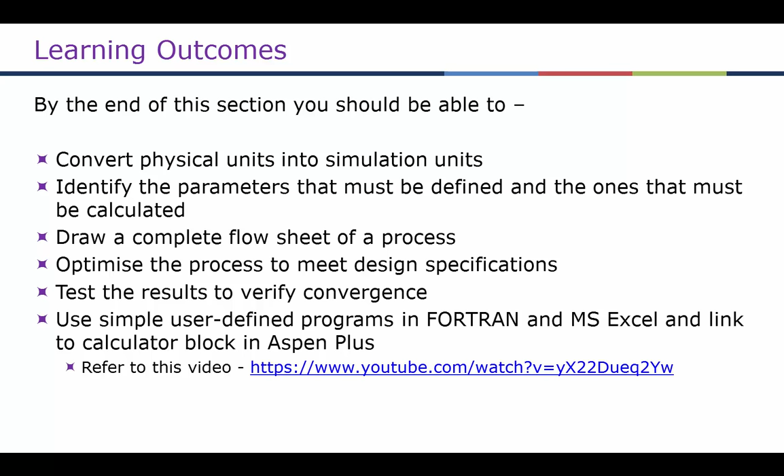Test the convergence and verify it, and use simple user-defined models like Excel and Fortran and link it to the calculator block in Aspen Plus. For the last part, for the calculator block, you can refer to the video link given here, and it's also in your lecture notes.

So the equation-oriented modeling is an alternative strategy for solving the flow sheet in Aspen Plus. We have briefly talked about equation-oriented modeling when I was introducing the process simulation in Aspen earlier.

The effectiveness of equation-oriented modeling is best when we are trying to optimize a process or solve a process which has been highly heat integrated or has many recycle loops or nested recycle loops, like the example given here, where the mixer 1 has got a flow going into flash, which then goes back into flash, second flash, and then recycle. And then you can see the recycle loops are kind of crossing over.

So this will have multiple tear streams when solving the sequential modular approach and can give some convergence problems, whereas equation-oriented modeling solves it in simultaneous equations and therefore gives you a better chance of converging this.

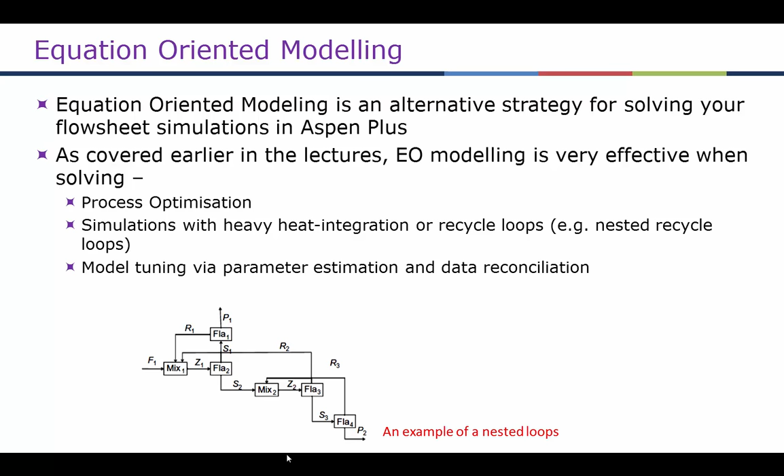We can also use this for model tuning or parameter estimation or data reconciliation. So model tuning is when you have an existing model or existing plant where you need to do some tuning. Parameter estimation is also for model tuning but gives you some extra degrees of freedom. And data reconciliation is again trying to optimize existing plant operation to get more profits or something for the process.

So the way to model a process in Aspen Plus is very similar to the sequential modular approach. The initial steps are the same. The sequential modular approach and the equation-oriented modeling approach are the strategies for solving the simulation once we have set up the flow sheet. The input required for both approaches is kind of similar, except the equation-oriented modeling approach requires a few more inputs.

We need to learn about the attributes of variables, and therefore we'll need to in the future learn how to change those attributes of variables, including their specifications. So I'll talk about what the attributes of variables are and what the specifications of the variables are in a few slides time. We'll need to then connect those variables and define our new equations which the equation-oriented modeling will solve. We may have to define an objective function for optimization problems.

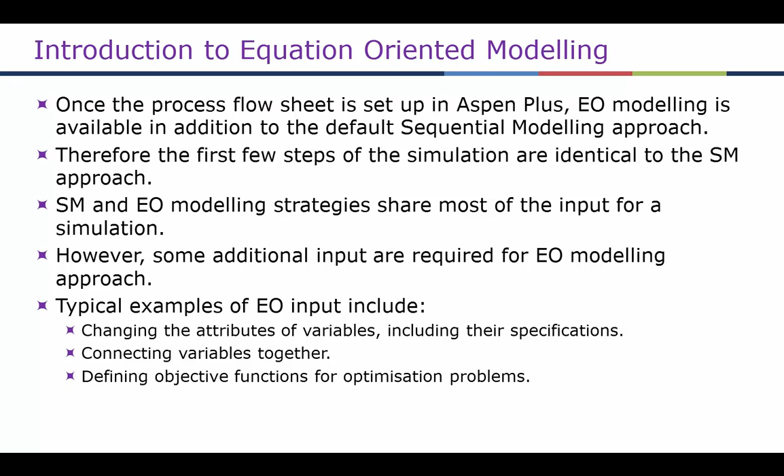Equation-oriented modeling approach works well when there is an existing solution which is close to the desired solution. In other words, it means that we need a good estimation. So it's always good to solve a flow sheet using sequential modular approach first, which is called initialization. And then when we switch to the EO mode, the EO mode synchronizes the solution with the SM mode and gets the first guess, and then uses that initial estimation of the solution to then solve the problem the way you want it to.

The sequential modular approach works only in one mode of operation. It has simulation mode, which is the default mode which you have been using so far in Aspen Plus. The model inputs and parameters are fixed and has no degrees of freedom. The choice of the variables that are specified in the input form determines which variables are fixed. So, for example, if you enter the temperature and pressure of the stream, then those parameters are fixed because that's user input.

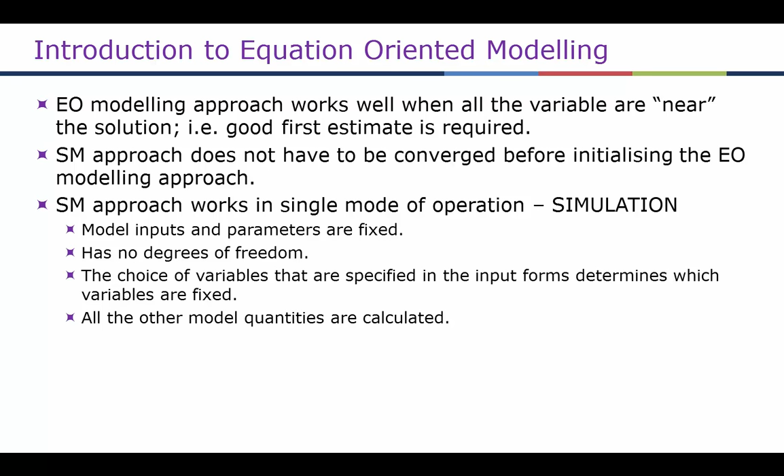The parameters that we do not specify are the ones the sequential modular approach will calculate. So those are called the calculated values, and the user input parameters are the fixed or the constant values.

The EO modeling approach, on the other hand, has got 4 different modes of operation. Most often you're going to use only the simulation approach again in Aspen Plus, and in this lecture I'm going to only cover the simulation approach. This mode is a prediction mode and has again no degrees of freedom, similar to the SM approach. For a given feed condition and operating parameters, it computes the solution for the products.

Whereas parameter estimation is a model tuning mode, has no degrees of freedom again, but inputs and certain outputs are fixed and the model parameters are computed. It requires one measured variable for each estimated parameter. So this is the attribute of a variable.

Reconciliation mode also is for model tuning. It typically minimizes the weighted least square objective function. So we need to define an objective function, and then the model reconciliation will minimize the weighted least square objective function deviation between the model predictions and some plant measurements. So you need to have data from an existing plant to minimize the solution again.

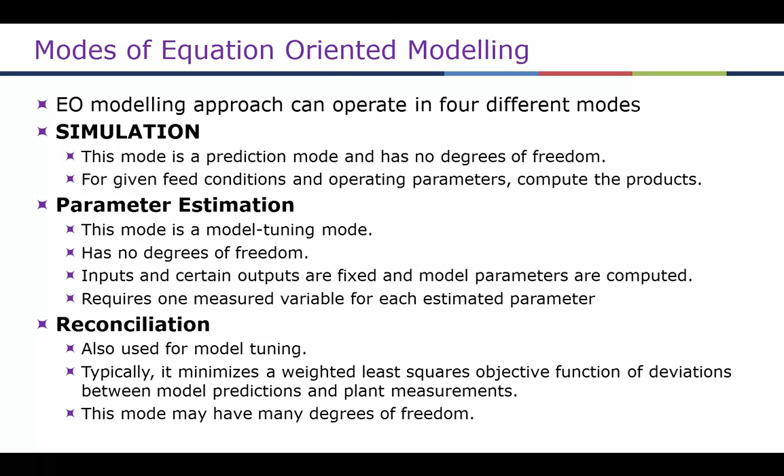So what I'm trying to say is you're going to model an existing plant and try and predict the behavior of an existing plant using the reconciliation method. So this mode can have many degrees of freedom. Optimization. In this mode, usually you have again some operating conditions from plant. Those are given as set points, and you want to then maximize or change those set points so that you can maximize the profit, and therefore again you have many degrees of freedom here.

The fundamental difference between all 4 modes of operation is the way the variables are treated. So now I'm going to define what those specifications of the variables are and what the attributes of the variables are. So the status of the variable can either be fixed, free, or have degrees of freedom. So these are the attributes of the variable. When the variable is fixed, the solver cannot change the variable value.

For example, for a feed stream, you might have given the temperature of the stream. Aspen cannot change that temperature until you do design specification or something like that, which we will cover in a few minutes. But in a normal solution, Aspen Plus cannot change the value which a user has input. For example, temperature, pressure, flow rates, and so on, for which we have given the value. So those values are fixed.

The free values are the ones which solver calculates. So for example, you may have a reactor, a Gibbs reactor, or RGibbs. You have a feed stream coming into the reactor, and the Gibbs reactor estimates what will be the product stream flow rate and the component flow rates. So those are all calculated values depending upon the Gibbs minimization of the problem, including all the reaction equations that the reactor is trying to model. So the solver determines the value of those variables from calculation.

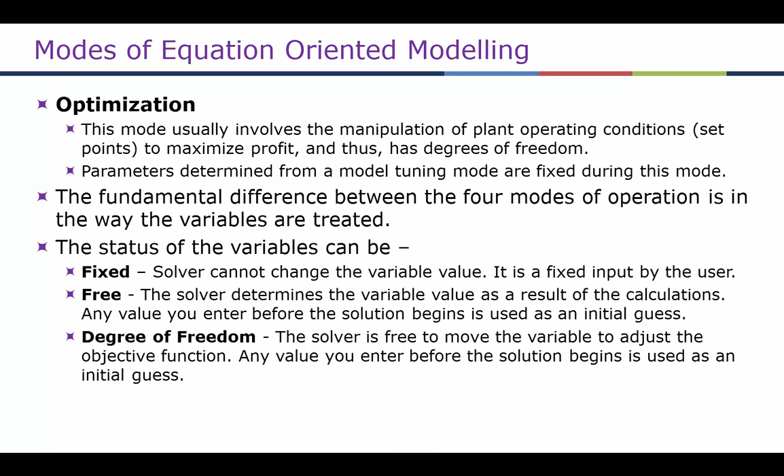Degree of freedom is an attribute of a variable when the solver is free to move the variable to adjust an objective function. So therefore, of course, there must be an objective function for which the variable is trying to have multiple values or have degree of freedom. So the Aspen Plus can move the value of that variable. So any value that we enter at the start of a simulation is treated as an initial guess, and then Aspen can then change those values depending upon how it wants to minimize the weighted square function of the objective function.

That's the same attribute for all other modes as well. So for parameter estimation, reconciliation, and optimization, again, calculated and constant value attributes are the same. So these are Aspen defaults. When we open the simulation in the sequential modular approach first and then switch to EO mode, we have only two attributes, either calculated or constant. If we want, we can change those attributes to measured, parameterized, optimized, reconciled, or independent, depending upon the type of the problem we want to solve.

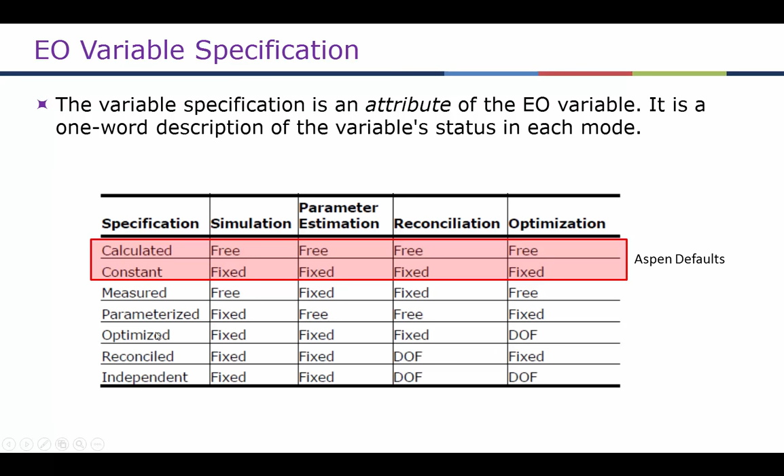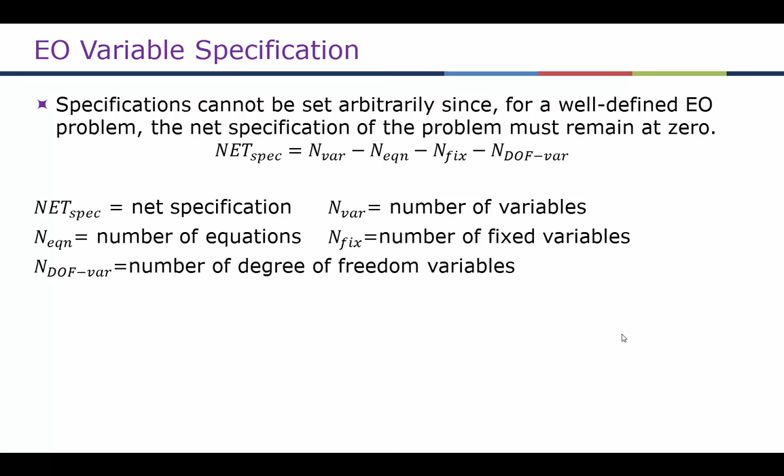However, we cannot just arbitrarily set any variable to fixed or measured or optimized and so on. These attributes have to be well defined so that the net specification of the problem remains 0. What that means is, if you use the equation net specification equal to number of variables minus number of equations minus number of fixed variables minus number of degree of freedom variables, the net should be equal to 0. If the net is 0 and there are no degree of freedom variables, then the problem is square, which means all variables are either constant or calculated. So that's the default system in both SM and EO simulation mode.

And the solution can be attempted using nonlinear equation solution, such as Newton method or Wegstein method and so on. However, if there are degree of freedom variables and still the net specification is 0, then the Aspen solver will try to minimize or maximize an objective function. So we define objective function right at the beginning in the first week of the lectures. If you are still not sure what an objective function is, you should go back and listen to the recording of that lecture.

If the net specification is more than 0, which means a positive value, then the problem is underdefined, which means you have more variables than the number of equations, and therefore it can have many solutions. If the net specification is less than 0, it means you have fewer variables and more equations, then there are no solutions. This problem is overspecified. So if net specification is more than 0 or less than 0, the problem is either underspecified or overspecified, and this will result in an error message in Aspen Plus, and it will not attempt to solve the problem. Right at the beginning, it will give you an error.

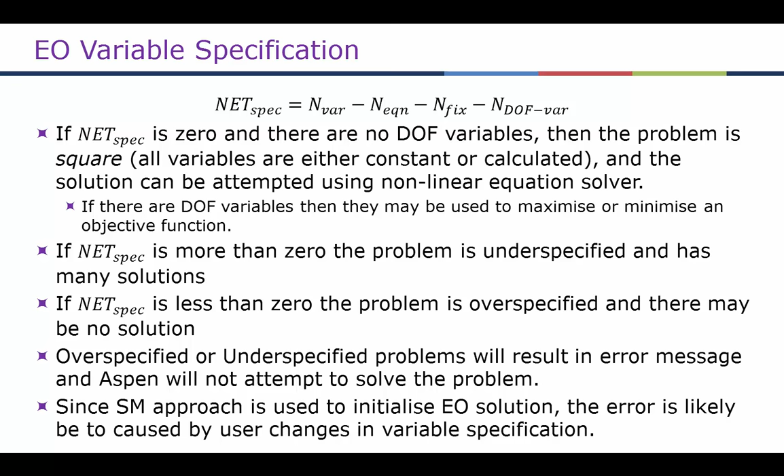Since the SM approach is used to initialize EO solution, you would have set up a flow sheet, you would have run it once in sequential modular approach and then switch to EO mode. The error can only happen if you change the attributes of the variables or the specification of the variables, right? So when you're changing the specification of the variable, we need to keep in mind that the net specification does not change from 0. If you have changed more variables than you should have, then the EO solver will give you an error message.

In both SM and EO solution, we have the desirable variables either constant or calculated. We can switch between the two in both SM and EO modes. So we can, for example, make a constant variable a calculated variable if we want. In SM mode, the way to do that is to create a design spec. So we will look at a problem very soon, but just to be clear, the way to change the attribute of a variable from constant to calculated or vice versa in SM mode is to use a design spec.

However, introducing a design spec often introduces an additional convergence loop. So you already had a convergence loop. Let's say there was a recycle, so it would have created a tear stream, and you had that for a recycle loop. But if you introduce a design spec, it introduces another convergence loop, which means another solver, which will try to do the recycle solver and the design spec solver together. So we are now introducing additional complexity in the solution. And when there are nested loops in the solution, SM approach might fail to converge to a solution. However, we can still switch to EO mode as long as we have initialized the problem. Whether or not the solution is fully solved, we can switch to EO mode.

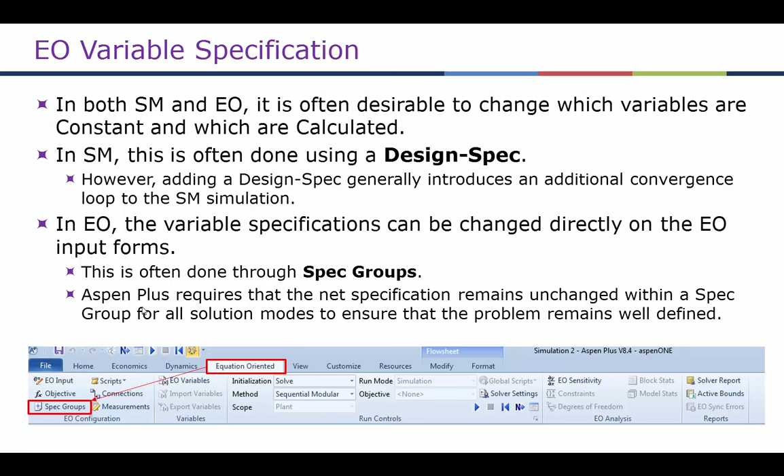So here's an example. In this example, we are going to recover acetone from a mixture of water and acetone using MIBK as a solvent. So this is a liquid-liquid extraction problem. In reality, you could just do one block, which is the extract block in Aspen Plus. However, in this case, to show the nested loop, I have created a three-stage liquid-liquid extraction problem in which the feed is mixed with a recycle stream coming from a decanter.

So you can see the first stage, the feed comes in and is mixed with the lighter component stream from the second stage, and the mixed stream goes into a decanter where the product extract comes out, and the heavier liquid product goes into another mixer where it is mixed with the lighter liquid stream from the third stage, and so on. So it's a counter current liquid extraction system with three stages.

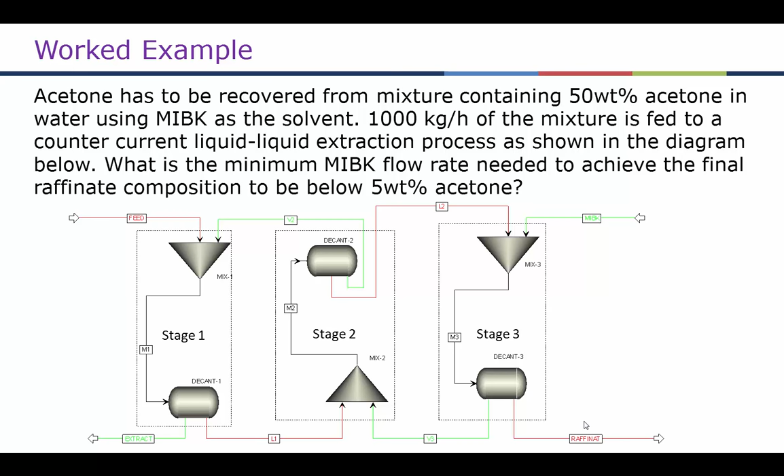The question asks you, what is the minimum MIBK flow rate needed to achieve the final raffinate composition below 5 weight percent acetone? In other words, we have to reduce the acetone composition from 50 weight percent in the feed to 5 weight percent in the final raffinate. We will look at a sequential modular approach first before moving on to the EO mode, because that's how you will have to set up in the first place. So let's have a look at the solution.

So I've already entered the components, and then we select a proper method. So NRTL method will be useful in this case because we have a two liquid problem, and we click on NRTL binary interaction form to download all the binary interaction parameters.

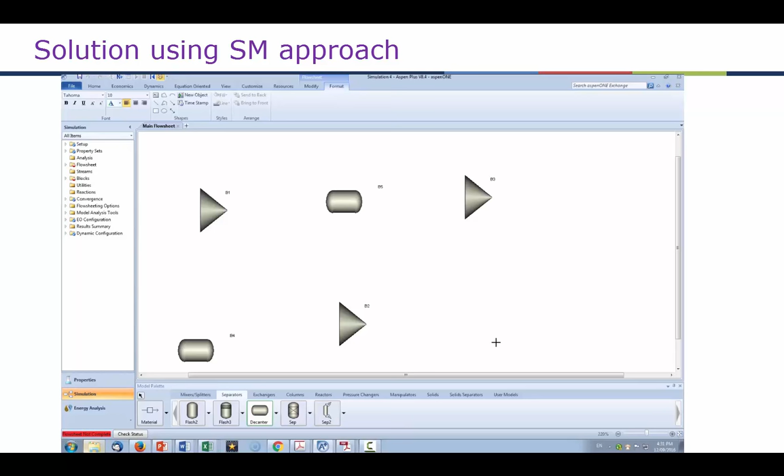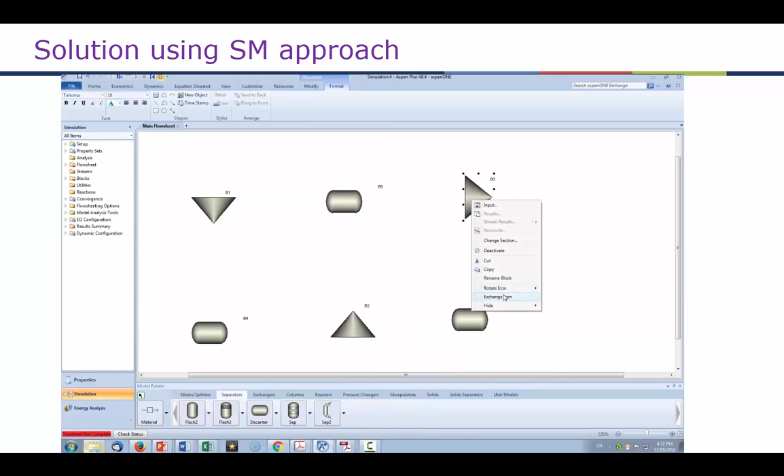Now we can start putting our flow sheet together, and I'm just going to add the blocks first and then connect all the streams together to match with the problem as specified. So we had three mixers and three decanters, and then the feed stream will be coming into the first mixer block, and then it will be connected to the decanter. So I'm just adjusting the orientation of all these blocks.

So we first add the feed stream to the first mixer, then connect the outlet of the mixer to the decanter. Now here you have to be careful which liquid you choose. So I'm going to choose the first liquid as the extract and the second liquid as my raffinate. So raffinate will be rich in water and extract will be rich in MIBK.

Now the stream from the second mixer goes into the second decanter, and again the second liquid is then sent to the third stage. So it will go to the mixer of the third stage, whereas the first liquid will go into the first stage because it's going in the countercurrent direction.

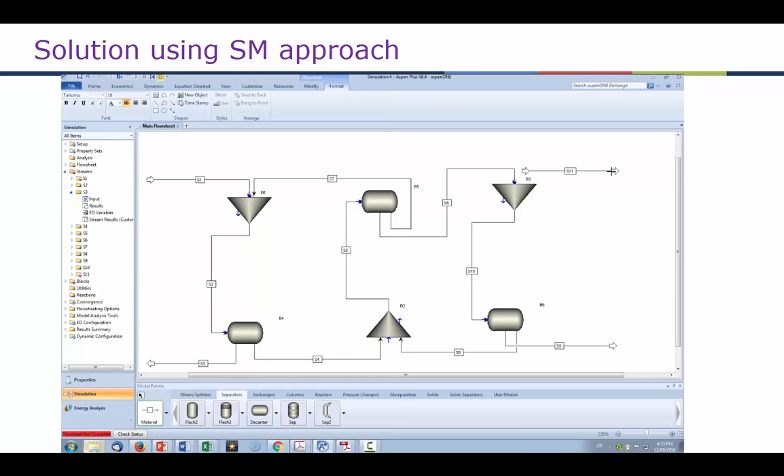Now for the third stage, the second stream will be the raffinate stream, and the first liquid will be going into the second stage. So this is the second liquid, which will be our raffinate product stream, and the mixer will be then connected to the decanter. And finally, the third stage mixer will be connected to the feed stream of MIBK.

So now we have joined all the loops. We can rearrange the streams so that they are well aligned. We can relabel the stream names as required. So you can have a look at the problem statement to see what labels I have used, and then pause here and you can do that on your own time. I'm not going to label all of them right away. Only the terminal ones are important, so just labeling the terminal flows for now.

Okay, so now we can start entering the information. Since the liquid-liquid extraction problem is normally done at room temperature and atmospheric pressure, we're just going to stick to 30 degrees Celsius and 1 bar pressure. The mass flow rate is 1000 kilogram per hour for the total, and the composition is 0.5 for each of acetone and water. We can leave the pressure drop for decanters as 0, and the temperature will be 30 degrees Celsius.

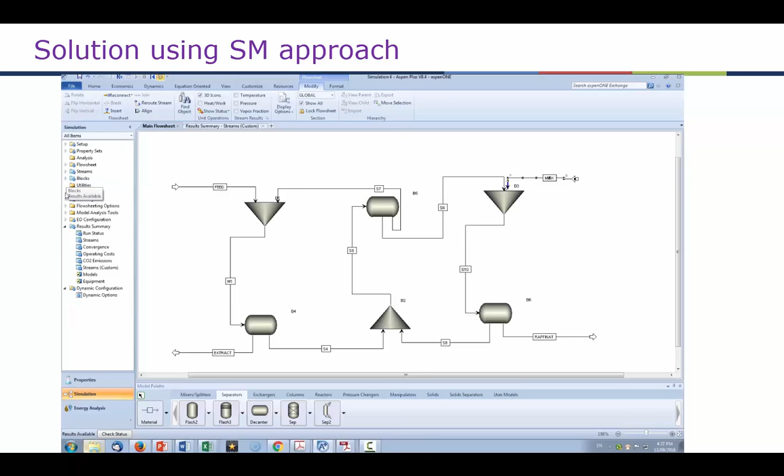So here we can go into flowsheeting options and design spec, create a new design spec, and define a new variable. So I'm going to call acetone the new variable, and we want to control the stream composition. So select a stream category and then look up mass frac for the mass fraction, and the stream we want is raffinate and the component we want is acetone. So that defines the variable.

We need to enter the specification that we want. So right click on the spec and then drag the variable that we want. So it defines the variable that we want to control. The target is 0.05, which is 5%, and the tolerance we can enter 0.005.

Now we need to vary the variable that will control the flow rate. So here we want to control the stream flow rate. So we can go to mass flow as the type, and the stream we want to control is the MIBK stream, and the component flow we want to control is MIBK. Here we can enter the two limits, the lower and the upper limit. Remember, the value that we entered earlier should be between those two values. So the lower limit I've entered is 100 and the upper limit is 1000.

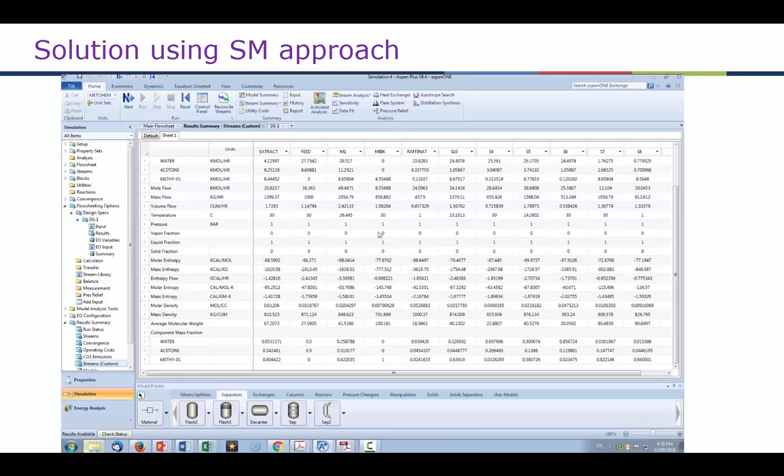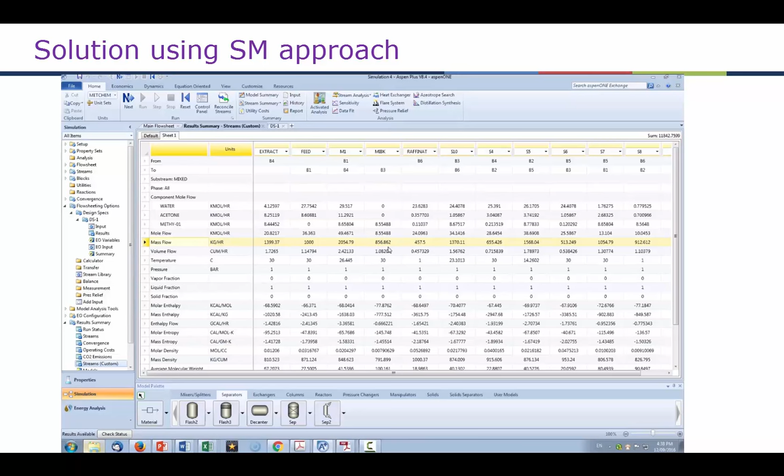So I can reinitialize and then run this problem, and it converges fine. So we can go back to our custom stream table and have a look here. The acetone composition is now within 5%. It's 0.045, and the MIBK flow rate needed is 856.86 kilogram per hour, which is above the 500 kilogram per hour value that we entered.

And in the design spec results, you can see all of that summarized. And if you go to the control panel, you can see that there are two solvers. One solver is for the recycle loops, and the other solver is for the design spec.

And if you scroll down, you should be able to see the number of iterations it has taken. So it needed 14 iterations to solve the tear stream, which was S5, to converge this solution. So that is how you would use design specification to change the attribute of the variable.

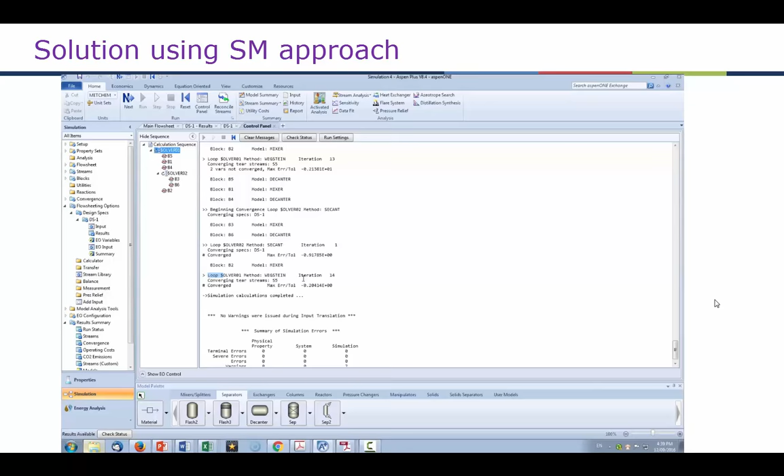In this case, the MIBK flow rate was constant at the start when we entered the value of 500 kilogram per hour, and then we changed constant to calculated value using a design spec. Now, before we go to the EO approach, we need to look at how to identify the variables that we want to change the attributes of.

To identify the EO variables, there is a format which Aspen uses to name the variables, and the format is block id dot variable id dot description, where the block id is the block name including the hierarchy names if appropriate, and the variable id is normally blk, indicating that the variable is within the block.

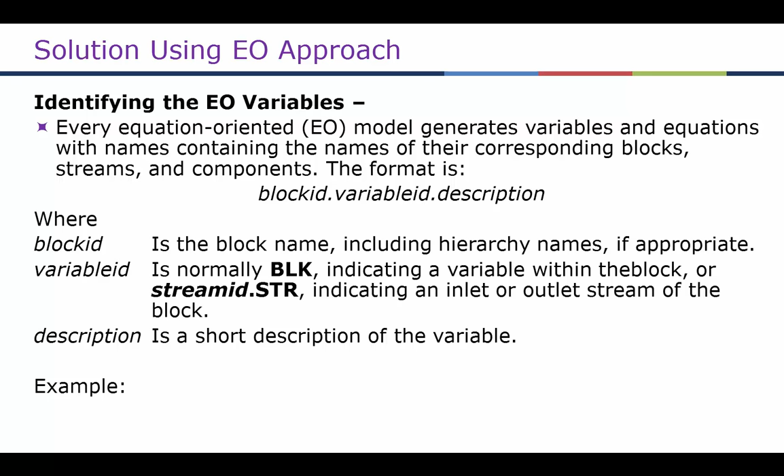In this case we want to specify the composition of acetone in the raffinate phase, and the composition must be 0.05. If we look at the variable IDs, which I'll show you in a minute, the variable IDs are in mole composition, not mass composition. So we need to first calculate the mole composition of acetone.

Now, to convert the mass composition into mole composition, we can't just use one value, 0.05, because to convert from mass fraction to mole fraction, we need to know the composition of all three components. So we can use the SM approach solution to look at the mole composition. In the SM solution, the mass fraction of the raffinate is 0.93 water, 0.045 acetone, and 0.024 MIBK.

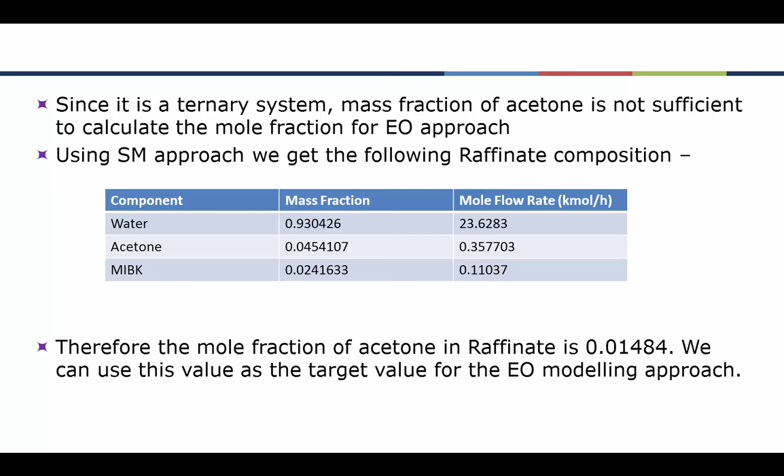And the mole flow rates are given in the stream table: 23.62 for water, 0.3577 for acetone, and 0.11037 for MIBK. So from here we can calculate the mole fraction of acetone in the raffinate stream, which is 0.0148, and we can use this value as the target value in the EO modeling approach. So let's have a look at the EO approach.

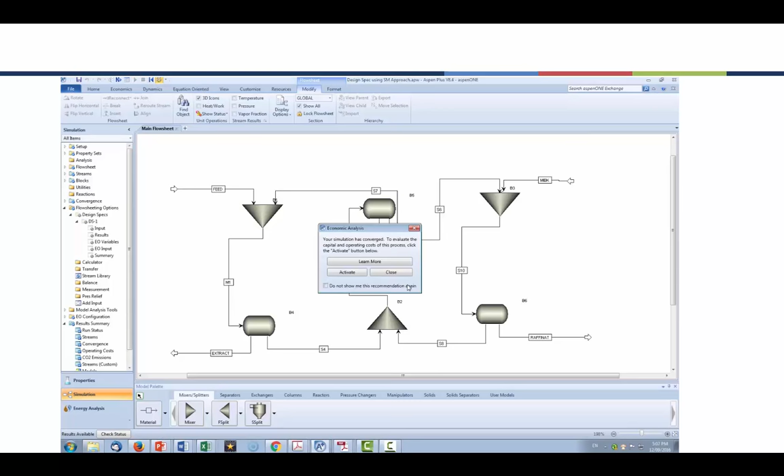This is the flow sheet that we had created earlier, and we can deactivate our design spec and reinitialize the stream so that we have the initial guess value of 500 kilogram per hour for the MIBK stream. Now that the stream has reinitialized, we can look at the custom stream table, and you can see we are back to the original value of 11.66 weight%, or 0.1166 mass fraction,

of acetone in the raffinate. To make the variable IDs clear, I'm going to rename the blocks. We want the first mixer to be mix 1, the second stage mixer to be mix 2, and mix 3 for the third stage mixer. Likewise, the first stage decanter we can call decant 1, and the second stage decant 2.

And the third stage we can label decant 3. This will make it easier to find the streams, and we can also label the stream numbers. I'm going to call the heavy stream, the water stream, L, and the lighter stream V. L1 is the liquid stream coming from stage 1, and likewise V2 is the lighter stream coming out of stage 2, and so on. This is the convention we normally use for separation processes.

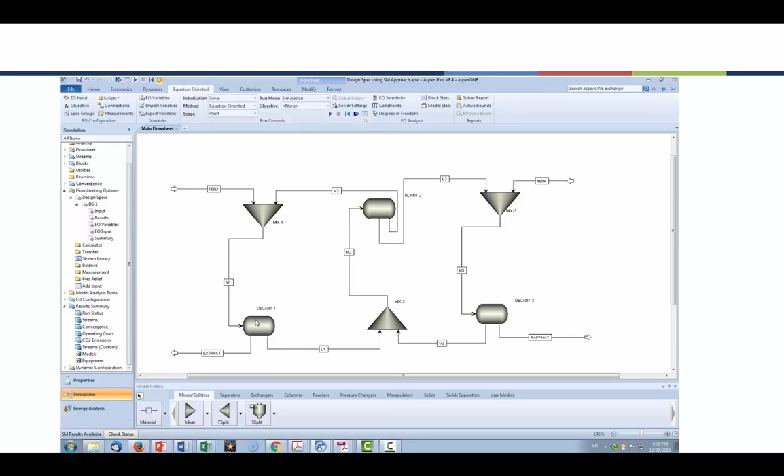The stream number is the number of the stage it is coming out of, and L tells us it's the liquid stream, and V stands for vapor, but here it's not vapor, it's just a lighter liquid. So now that we have labeled all of them, we can check our EO modeling variables.

So here, as you can see, mix1.blk.feed_moles. So that's a variable which tells us that mix1 is the first mixer. BLK tells us that this variable belongs to the block, and feed moles tells us that it's the mole flow rate of the feed stream, feed being the stream that we have defined.

Likewise, we can choose any other property, like here row number 20, it says mix1.blk, so that must be the block mix1, and .blk is telling us that this variable belongs to the block, and it says .heat duty, so this must be the heating duty of the mixer, and naturally the heating duty of the mixer is 0, it's adiabatic.

You can scroll through these and have a look at the variables to identify what variables are defined, and also check the specification. So either they are calculated or they are constant, as we might expect, because this is a simulation. You can see the run mode is simulation on the top here.

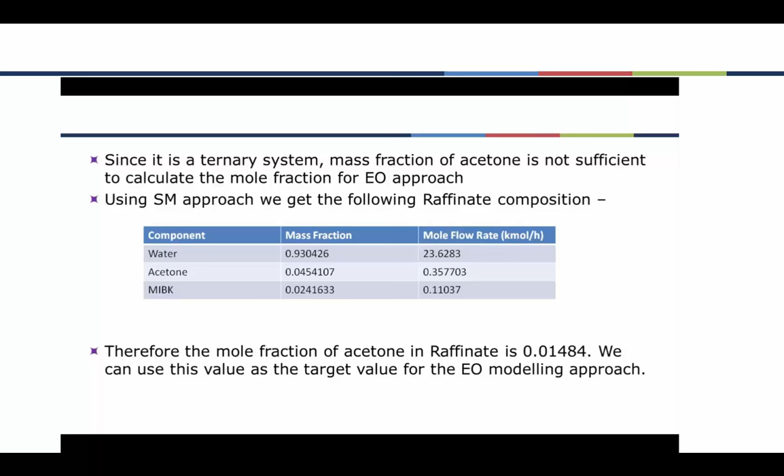Now here we have the summary of what composition we want to achieve, which is 0.0148 for the acetone in the raffinate stream coming out of the third stage. So that is the mole composition that we want to enter for the block, the ID that we had looked at earlier. So we can go to the spec group and start defining the specifications for the variables that we want to change.

So first we can select decant3.blk.raffinate_acetone. So this is the composition. This was earlier calculated. Now we want to make it constant, and we want to enter the value of 0.01484. The physical type of this is contents, and the unit is fraction. That you can check in the attributes page, or the EO variables page that we had looked at earlier.

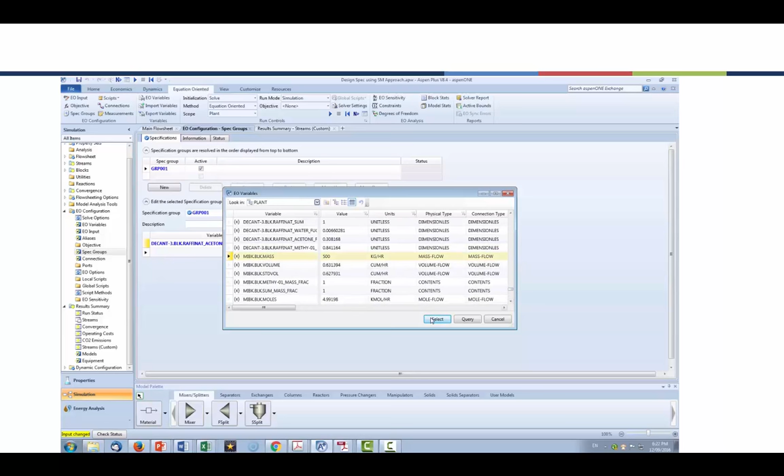Now we want to change the flow rate of MIBK. So go to MIBK and look at blk.mass. That's the mass flow rate of the MIBK stream, and we want to make it calculated. It was earlier constant. We don't need to enter the value, of course, because EO will calculate the value of this stream. The physical type is mass flow, and the units are kg per hour. And we can then run this simulation.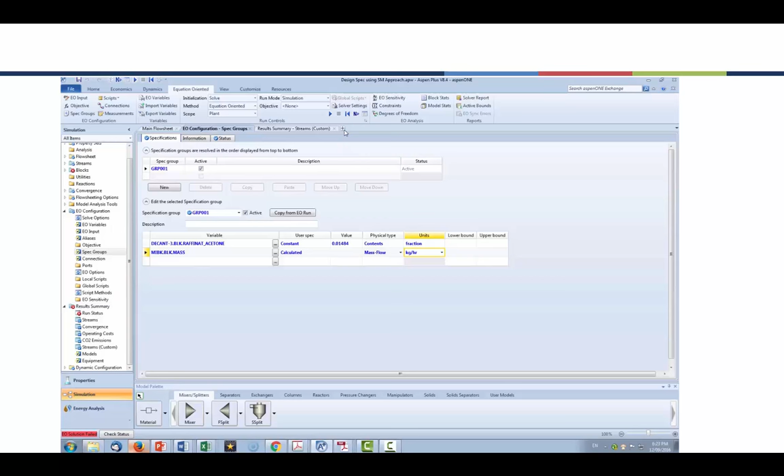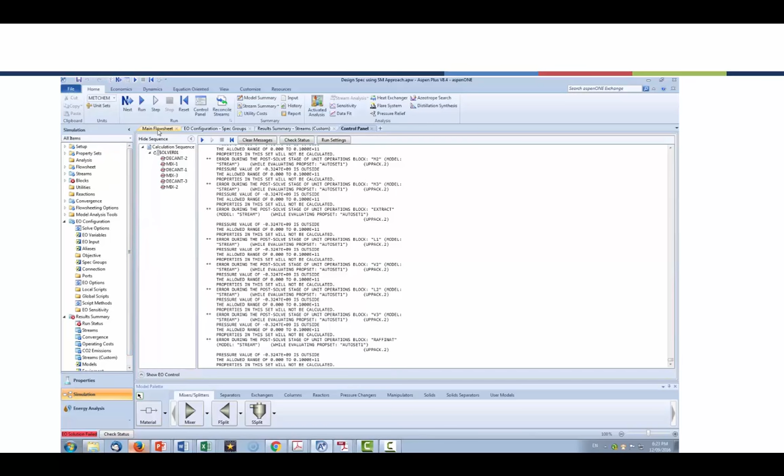We get some error here, EO solution failed, it says. So let's go to our control panel and have a look at the error. It says the pressure value of minus 0.32 is outside of the allowed range of 0 to 0.1, and it gives that error for all the blocks and all the streams. And it says that the error is coming from the post solve stage.

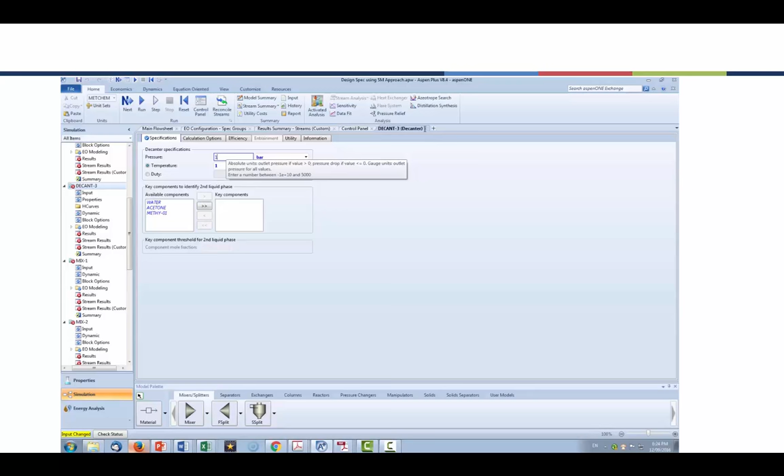So instead of giving 0 pressure drop, it's better to enter the actual pressure. So I'm going to go back and change the pressure to 1 bar in all the blocks. So EO might have been able to solve the problem, but then while doing the post-solve check, it got an error in pressure balance. So having that 0 might not be giving us the solution.

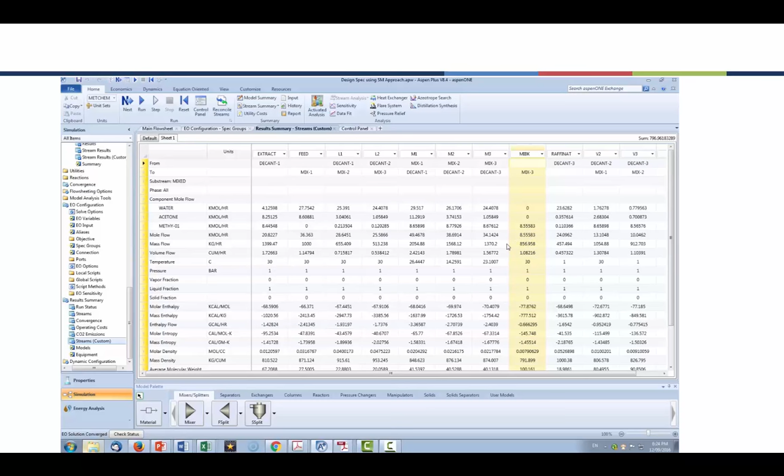Okay, now that I have changed that, we rerun this problem, and this time the EO solution has converged. And we can go to the stream summary and have a look at the stream raffinate, which gives us the design specification that we wanted. And you can see the MIBK flow rate is 856.958, which is very close to the SM value that we achieved.

And in the control panel, you can see the number of iterations is 0. It solves all the equations simultaneously, and it used very little time. These are the statistics for optimization, and the total optimization time needed was 0.02 seconds. It tells you the objective function value and the objective convergence. Obviously we don't have any objective function here. The residual convergence function had a very small value, nearly 0, so all those are 0.

So that concludes this lecture. And again, we have a tutorial problem later to give you some hands-on practice to work on a simulation and then enter a design specification in the SM modeling approach, and then you reinitialize it and then run the problem using the EO modeling approach.